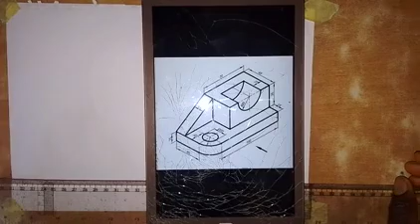Let's work on the orthographic views of this object, isometric block. Looking at the object in direction of this arrow, we want to draw the front view. So in the front view, we are going to have this rectangle, and then we have this surface, and then we also have this triangle here.

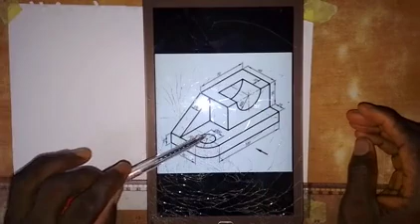So we also see, by drawing this semicircle, this shape here, which is part of the front elevation, will come out. So that's what we have there. And then this hole will be hidden from us. So the length from here to the center here is 100. And then the radius of this curve here is 20 millimeters as shown here. Alright, so the diameter of this hole is 20. Okay, so that's what we have.

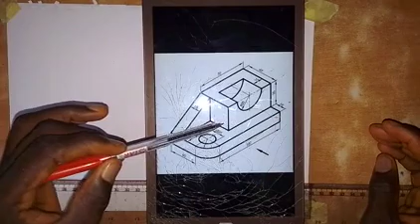And then the thickness from here to here is 15. So thickness here is 15, and height here is 35, as you can see it there. So let's start with the front elevation.

So here we are going to draw a horizontal line, and then we are going to draw a vertical line. So we draw a vertical line here. Alright, so the total length of this rectangle, it will be a rectangle all through, will be 120 millimeters. So we take a measurement of 120 millimeters. So this is 120 millimeters.

Okay, so then at this point we draw a vertical line, and the thickness is 15 millimeters. So we take 15 millimeters here, and then from here we take 35 millimeters up. I can't see this very well. So 35 is here. So we have 35 millimeters. So here we are going to draw a horizontal line on each of these points. And here we draw a horizontal line.

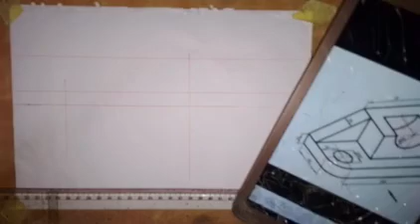Alright, so we have already drawn this rectangle. Let's put the hole inside. So we take a measurement of 20 to locate the center of the hole, and then we take 10 to this side. We take 10 to this side because the diameter of the hole is 20 millimeters. So we draw this line as a center line. Alright, so here we draw this line, and then we also draw this line. Alright, so that's what we have there.

Okay, so the next thing that we are going to do is to create this shape that we have here. So the length from here to this point is 70 millimeters. So we come up here and take a measurement of 70 millimeters. This is 70 millimeters, and we get the midpoint, which is 35 millimeters. So we draw a vertical line here, a vertical center line.

Alright, so the next thing that we have here is that the radius of this semicircle is 20. So we have to draw that semicircle of radius 20 millimeters. So we take 20 millimeters with the compass, and we draw the semicircle. Alright, so we have that.

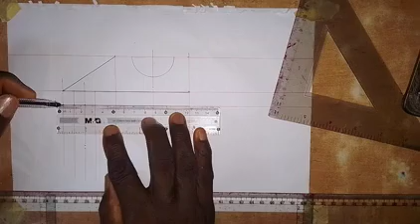Okay, so we also make this line a thick line. And this line also, we make it a thick line. Alright, and then this line, from here to this end, will be a thick line. So why? Let me show you what we have here. This line that we see here, we join with this line, and they will all form one thick line.

And then, for us to complete the front view, the hole is hidden. The hole is hidden. Okay. Alright, so this is what we have as the front view. So here we have the front view.

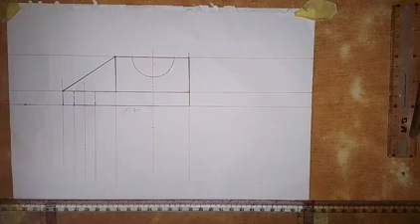Alright, so let's go and draw the top view. For the top view, what do we see? We see the surface like this. We see the surface, and then we see this rectangle. So those are the things we have to put together for the top view, including this circle that we have here. So let's look at the dimensions as we have here.

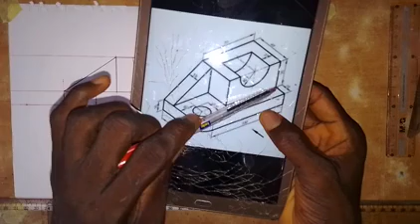From here to here is 45, and from here to here is 15. So in total that is 60 millimeters. So we come down a little bit from the front view and we draw a horizontal line like this. Having drawn the horizontal line, let's take a measurement of 45 millimeters. So from here we have 45 millimeters, and we draw a horizontal line.

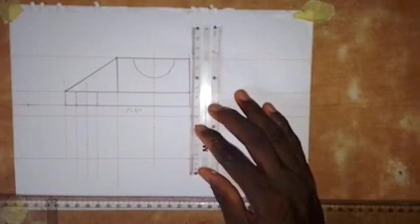From this end, we take 15 millimeters down. So this is 15 millimeters. So we draw a horizontal line. Alright, then the next thing that we are going to do here, we are going to draw a vertical line from this point. So here we draw a vertical line from here down, and then from this point also draw a vertical line down here.

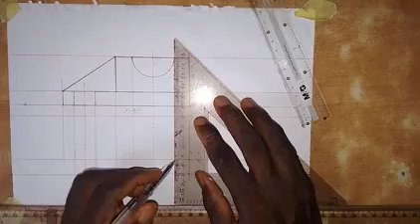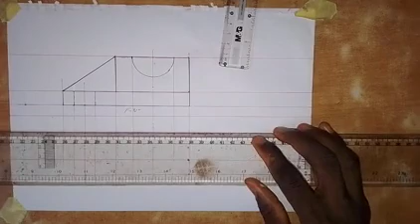Alright, so the thickness here from here to here is 15, as we had that from here to here is 15 millimeters. So we take a measurement of 15 millimeters. From this end here, this is 15 millimeters. So I will draw a horizontal line. So we draw a horizontal line.

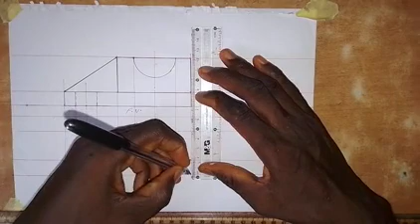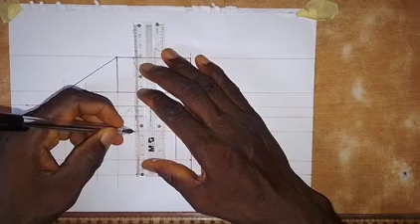Alright, so let's bring out the shape that we have here in the plan. On the top view, we have this shape, and this is going to give us a rectangle. So let's bring it out. The whole of this will be a thick line all to this end like this. And here we have this line as a thick line, and we also have this line as a thick line from here, and then here we have this line from here to here as a thick line. I've extended it beyond.

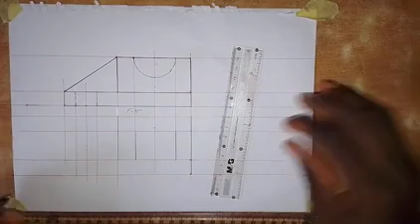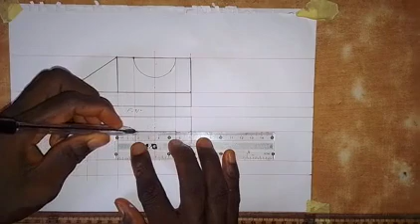Alright, so then we have a rectangle here for this. So we are going to see the rectangle, and then we draw this line as a thick line all to this end like this. Okay, and then what else are we going to see here? This line is a thick line like this. Okay, and then we make this line a thick line all to this end. Alright, so let's stop it here now.

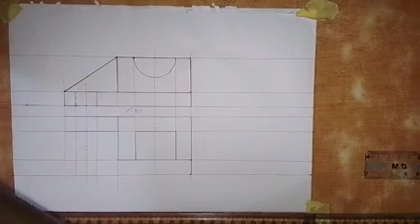Other things that we are going to do here, we have to draw the curve. Let me show you the curve. This curve here, we have to draw it here in the top view. So what we have to do is to create a square. So a square of, okay, it will not be a square, so we just complete this. So this is the center. And the distance from this point to this end is 20.

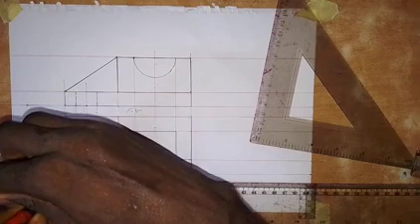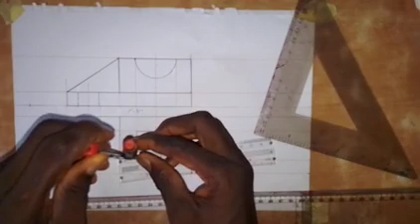So we draw an arc like this. Okay, alright, so we have the curve here. There we are going to take a measurement of 10 for the circle. The diameter is 20, so the radius is 10. So putting it here at the center, we draw a circle. So we draw a circle like this.

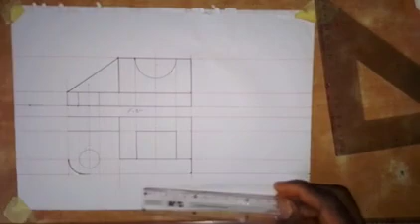Alright, so we have the circle there. Okay, so we're almost done with the top view. So we draw this line as a thick line to this end, and then this line we draw it as a thick line to this point. So this gives us the top view. So this is the top view of that object.

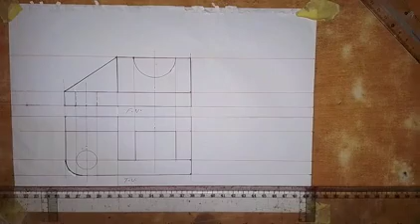Alright, so now let's go and draw the left side view. So we are not going to draw the right side view. Let's draw the left side view. So we are drawing it here since we are drawing the first angle projection. So what are the things that we are going to get as the left side view? So we are going to see this as a rectangle. We see this rectangle here, and then we see this surface, and the hole will be hidden from us.

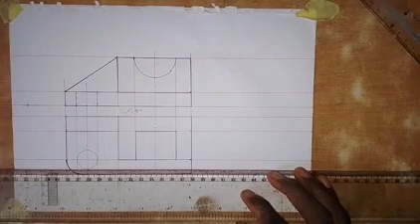So the total width, as we have already taken it. So the measurement, we are not going to be taking measurement here for the end elevation or for the side view. So we draw horizontal line from this point on the circle, and from this point on the circle we also draw horizontal line like this. So then this line, okay,

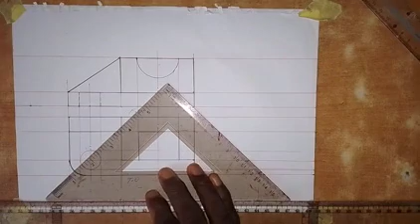so then with the set square at this point on the front elevation or the front view, we draw a line, and then from this point we are going to draw a vertical line here, okay, and also at this point we draw a vertical line like this, and then from this point for the hole that is hidden, we draw a vertical line up, and this is the center line,

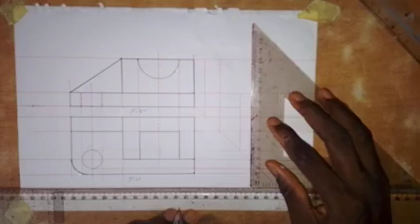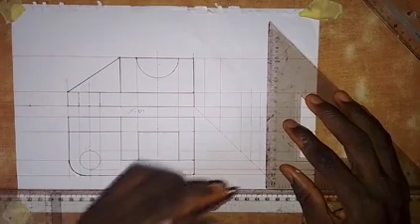so we also draw a vertical center line up here like this, and then at this point we draw a vertical line, okay, and then coming to this point, we draw a vertical line to this point, and then at this point that we have here, okay, alright, so this line has to go up like this.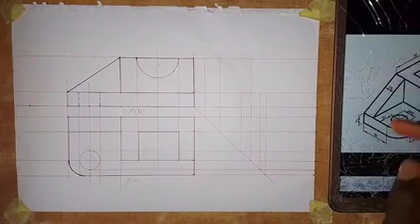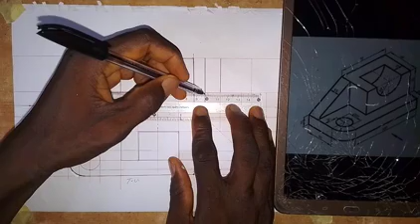Alright, so let's bring out the shape. So I will put the object here while we bring out the shape. So for this rectangle that we have here, so this is the rectangle, so we draw this line as a vertical line all through, and then at this point, so we have this line, draw this. Alright, so this is the rectangle, and then this surface that we have here, so it is from here to here.

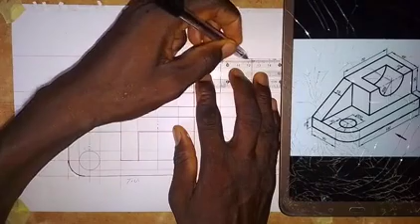Okay, so where do we have this line? So we have it here. So we make this line a thick line like this. Okay, so this line also, we make it a thick line, and this line that we have here, we also draw this line as a thick line.

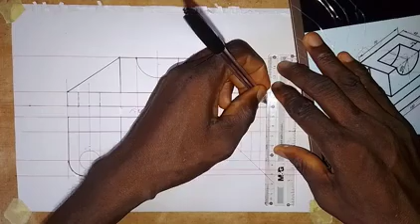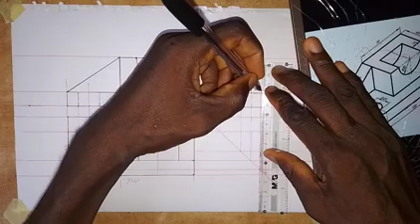So the whole of the rectangle on this surface, it is from this end here to this end here, and so that means we have to make this line a thick line to this point, and then we make this line a thick line here. Alright, so the other thing that we have here, this hole is hidden. So where do we have it? We have already drawn it. So we need to make this line short dashes line like this, and we also make this line short dashes line. Alright, so we have that.

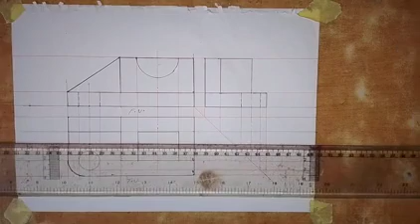So the other thing that we have here, we are going to have a line at this point. At this point, we are going to have a line, short dashes line. So that part will be hidden from us. So I'll just draw it at once. It goes like this. So it's within this surface here.

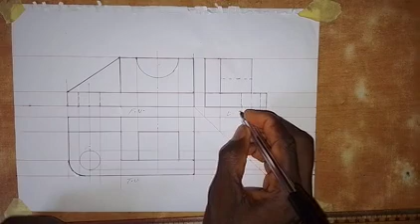Alright, so that is it. So this is the left side view of the orthographic view or isometric view.